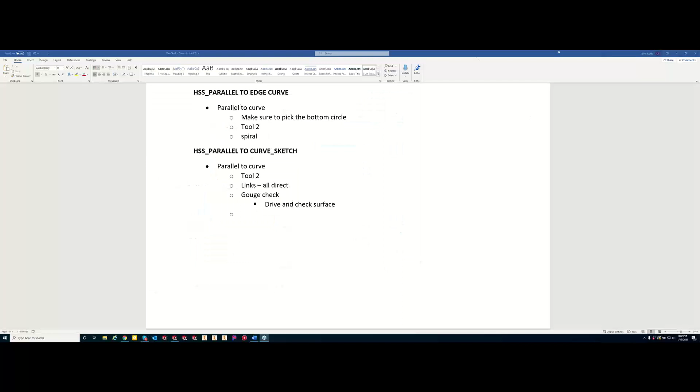So with that being said, we will get the ball rolling here. And now I got no extra monitors. There we go. Okay, so we've covered in the last few night classes HSS. We've covered linear, which is more geared towards our 0 to 45 degree angles, kind of like right here. We've covered constant Z, which works best between our 45 and 90, and we also did hatch.

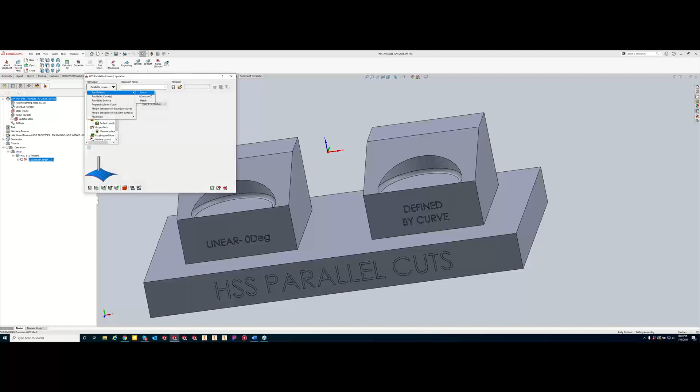So now we're getting into what I consider the real good stuff with HSS and the power that it has. So what I'm going to do is show you a difference between linear, and then we're going to be covering HSS parallel to curve or curves. So for our first one here, we are just going to do our linear, and I want to show you guys the power that HSS has in here. And let's get some toolpath on here. All right, so now we'll go ahead and save and calculate.

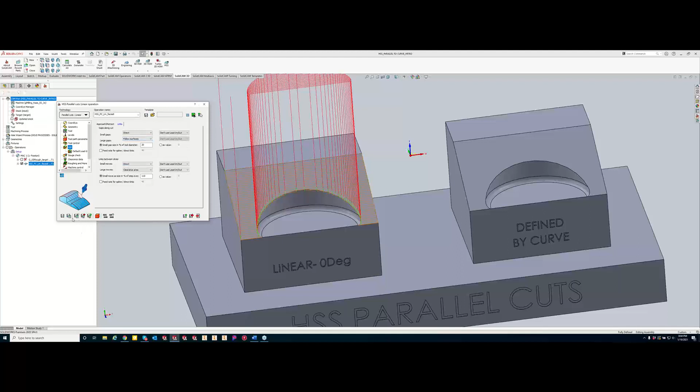Now, like what we've been talking about in previous classes, is how to clean up our linking to make smooth transitions all the way across. So what we'll do is we'll go to our link section, and we have a gap right here. So instead of going up to the clearance area, I'm going to tell it to follow the surface. All right, so we got a nice toolpath going back and forth, right?

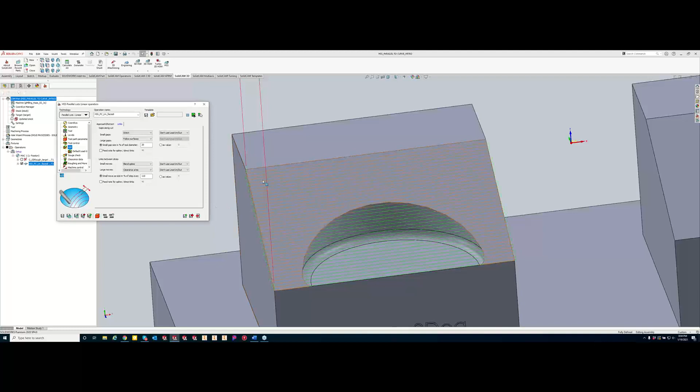Now, like we talked before, this is a little bit of refresh, but at the ends right here, we have those square moves. So what we can do here is, instead of doing those square corners right there, we'll do the blend spline, and we'll get those nice radiuses going all the way through, okay? So now we are basically skipping over this gap right here because we don't need to cut it. So we're cutting air in there.

Now, if we do not want to do that and we want it to drive our toolpath lines based off of a curve, that's where the HSS parallel to curves comes into factor. So what I'm going to do here is I'm going to just make an exact copy of our linear toolpath, and I will switch this over to parallel to curves.

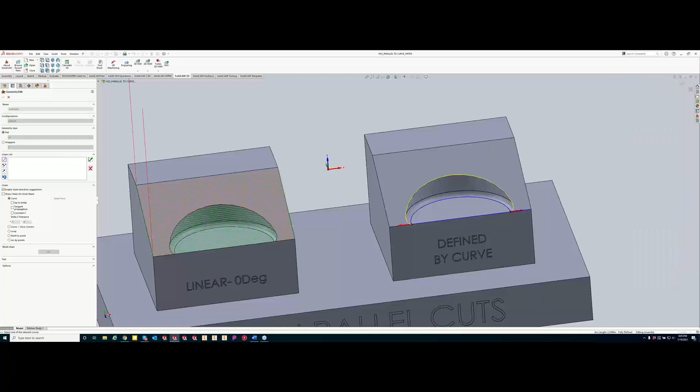So now our drive surface is the same surface as we clicked on the previous one. Now our edge curve is the curve that we want the toolpath to follow. As soon as I get this on here, this will be a little bit more clear for you guys. So now, instead of doing straight line movements going back and forth, we told it to follow this curve edge, so our toolpath reflects that now.

So now, with that half moon in there, we're not wasting any time cutting air. We're still achieving the same step over as what we had over here, but now we're not cutting air. Now, like we did on the other one, we can come to our links.

And then we can do a blend spline here. And we got a nice clean toolpath.

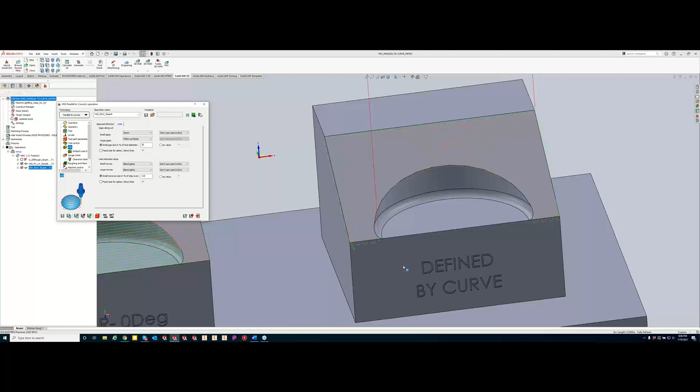So like I said, we're coming in here. Actually, we're starting at the top, and we're following that curvature going all the way around. So think of it, if you're trying to drive your tool to follow a specific shape. Now, the real nice thing about this is it doesn't have to be actually into the geometry itself. So right here, we have a half moon cutout with physical geometry there.

But let's go ahead and hop out of this part real quick.

Kevin, if I want that toolpath to be the same every single time, when you selected those parameters to have the toolpath follow the half moon shape, will those parameters remain there next time I come around to make that to do something similar? Nope, so they won't remain there.

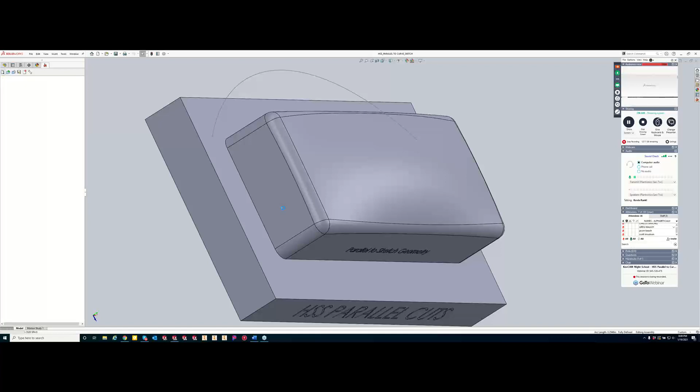But if this is something that you commonly want to do, what you can do is, let's say anytime we're cutting linear cuts and we want those, like our links, we always change up our links, and you guys have been seeing me changing up those links constantly through the linear and the constant Z and hatch. You guys can save that out as a template, and then you can also load that as your default template. So then what will happen at that point is anytime I pull up an HSS operation that is parallel to a curve, it will have all those parameters set up for me.

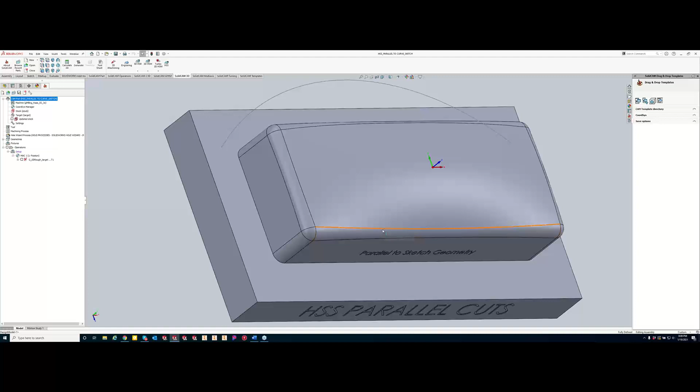Oh, okay. So I could just come back in and just select that template and off I go. Yeah, absolutely. So in here, let's do one.

So HSS. And for those of you guys that have been watching for a while, this GoToMeeting just takes my computer to its knees.

Okay, so if we are doing parallel to curve, and in my links section, I always want my links between slices to do a blend spline as well as a blend spline. For the gaps, I'm going to leave, well, usually with a large gap, I have it do follow surface. And that's about it. So that I want these to be a default. So every time I open up a parallel to a curve operation, this will already be set for me.

So how we do that is we can save it out and just do parallel curve, and we'll hit OK.

Oh, didn't like my name. Nope, didn't like something in here. I may need to grab. Well, no problem, Kevin. You don't have to go through the motions. I just wanted to know if it's possible to save it. That's really all I wanted to know.

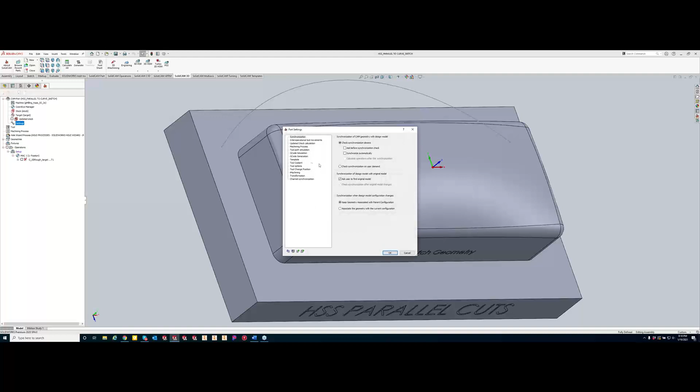When you get all your parameters set in there, then in your settings right here, we can go to our templates and we can go to our HSS and I can pick. So I don't have any templates set up. I'm just going to see if I have any of these.

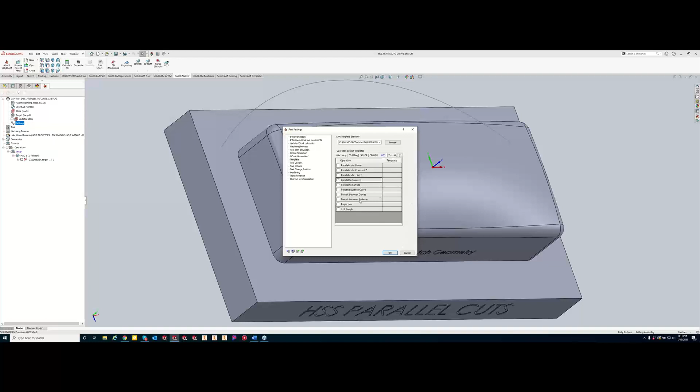So if I had my template set up, or saved as a template, while doing parallel to curve, I can pick my template. Any HSS parallel to curve operation I start new will have all those parameters set in there. This will do it just for this local part, or you can do it for your global settings, so any new parts you create will have that default template in there.

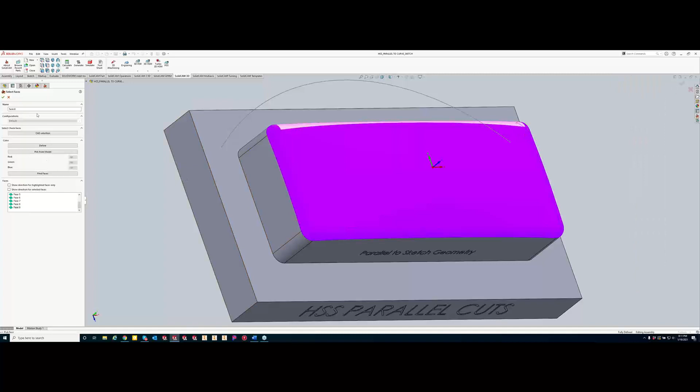Okay, perfect. So now we're going to do the exact same thing as before with our HSS parallel to curve. For our geometry, I'm going to select the surfaces that I want it to cut. Now the tool path, the tool lines I want it to follow, is this big arc right here.

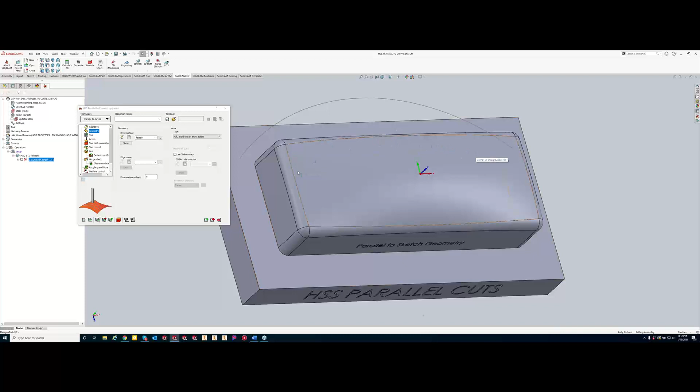All you have to do is right click and create a sketch. That sketch can be whatever shape or direction you want the tool path to follow, and it will follow that. So now let's set that up as our guide curve, I guess you could call it.

All right, so now let's just go ahead and save and calculate. And we got a lot of bouncing up and down, so let's go ahead and clear that up real quick. Link.

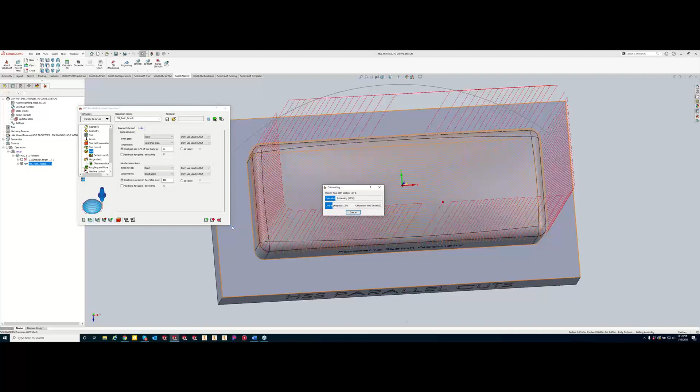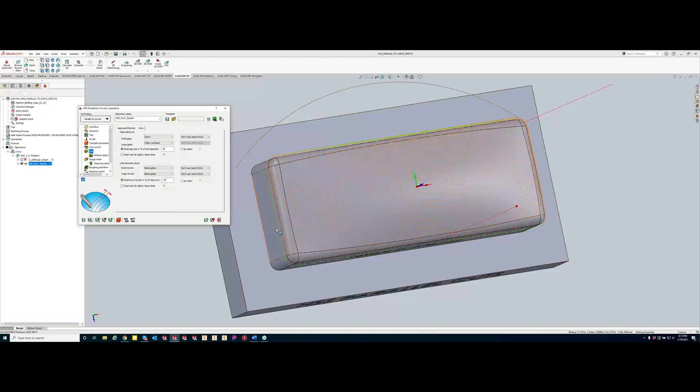We got some gaps on the back side, so I'm just going to do a follow surface. I did kind of forget to start off, but I've told everybody in the class: think of your HSS as a building block. Start with your geometry, start with your tool, save and calculate, get your tool path on there. So now I'm not changing ten different things at once, I'm just changing one or two things, save and calculate, to get what I'm looking for.

So now you can see, even though we're on this linear surface, it is following this guided curve for my toolpath. So this radius right here is going to be the same down here, just going back and forth that way.

Now, like any of the other HSS ones we talked about, there may be some gouging in there. So what we can do is go to our gouge check. For those that are new listeners, the gouge check is basically telling it that we do not want to gouge the part file.

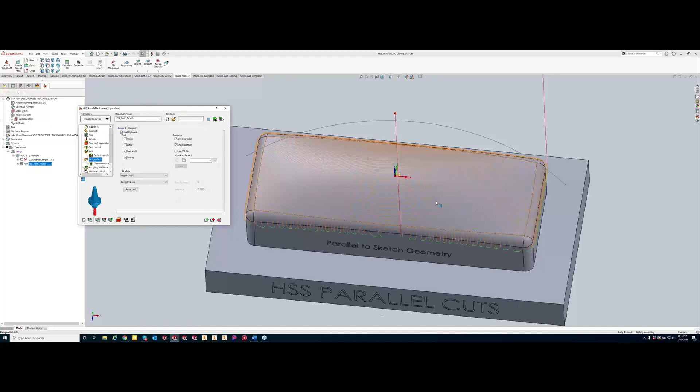Hey, Kevin, yeah, why don't you show the simulation first? That way everybody can see where the gouges are coming from and what steps you're going to take to rectify that.

Turn off. There we go. All right.

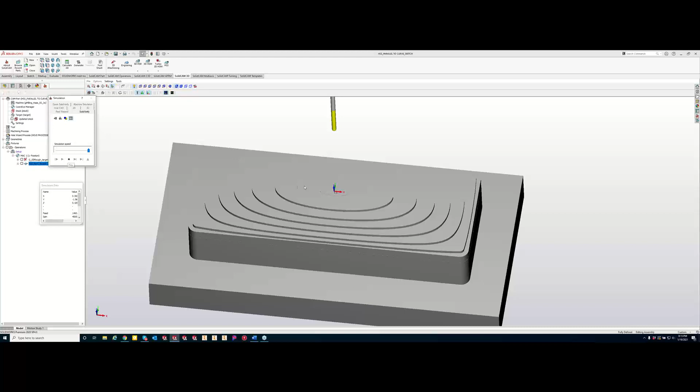Hey Kevin, is this the new release, is this 2021? Nope, not yet. Oh okay, sorry, didn't mean to steal your thunder there. Soon to come, soon to come.

All right, sounds good. So you guys can see right now we have a fairly large step over. That's kind of like what we've talked about in previous classes: keep that step over large, get that toolpath form we're looking for, clean up your links, and then one of the last things to do is tighten up your step over, and that will give us the good finish. But we'll let this play through.

Well, let me see my settings real quick. That's why. Switch over, switch back. I had a very, very high tolerance there, so let me get this fixed up here. There we go, moving a little quicker now.

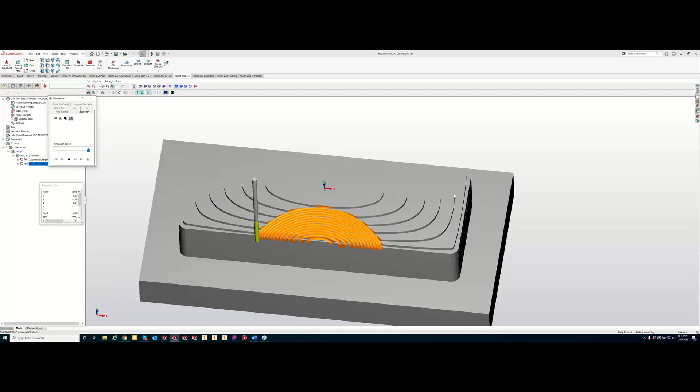All right, so now what Greg was talking about is let's see if we're gouging into our part here. And my go-to meeting is blocking. No. So we can see we're pretty close to up to size on our drive surface.

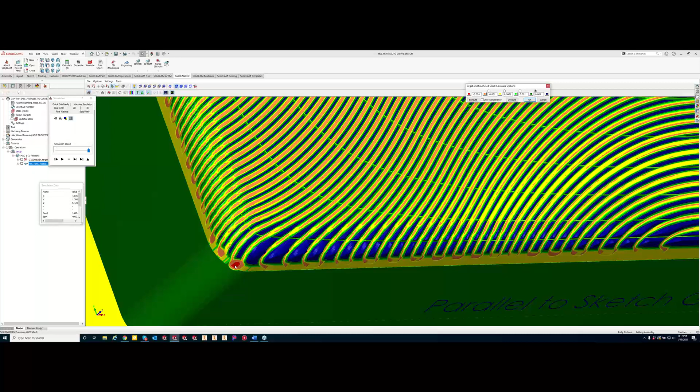Now, obviously, we want to play this through on a much finer step over, but right here I can already see that when it's doing the follow surface, we do have some gouges happening right here. Let's just hop out of here, and let's go to our toolpath parameters, and we'll set our step over to something smaller now.

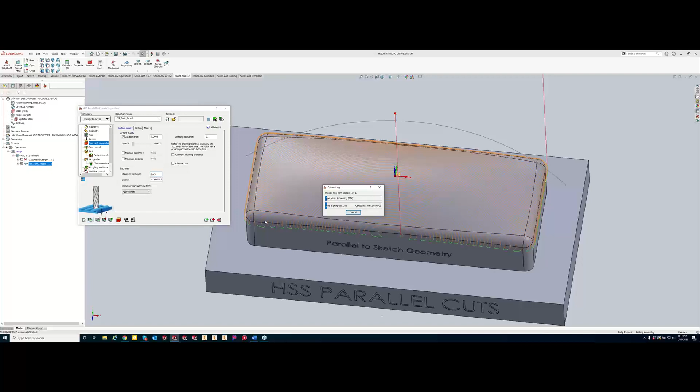So we can kind of see a little bit better of a surface finish in there. All right, so we got a much finer step over. And we'll go do our solid verify here.

Yeah, the only reason, Kevin, I was asking about 2021 was this calculation time was really impressive. I mean, but I hear that 2021 is even faster. Is that what I'm hearing?

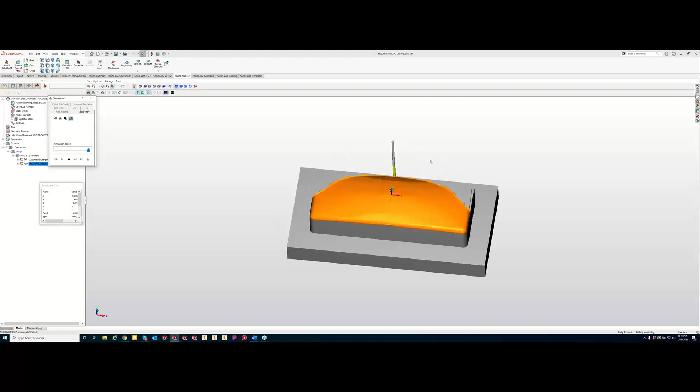Yeah, absolutely. I just got to get a new computer for doing these night classes because something to do with my current computer. It's just slow running this go-to webinar here, so usually this would calculate much faster and have quicker times.

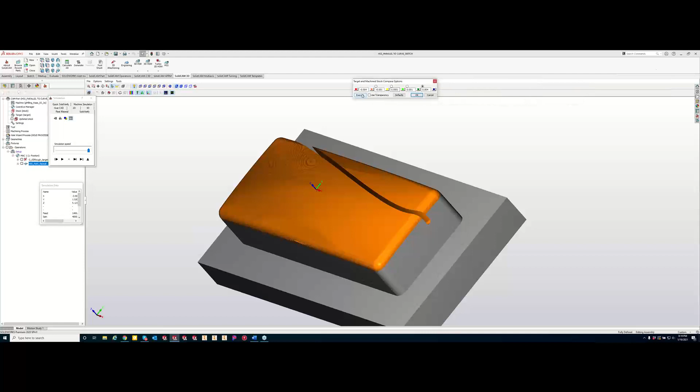As well as, let's kind of look back to one of these sides here. We can see that we're gouging along our backside as well. So now what we want to do is clean up those gouges.

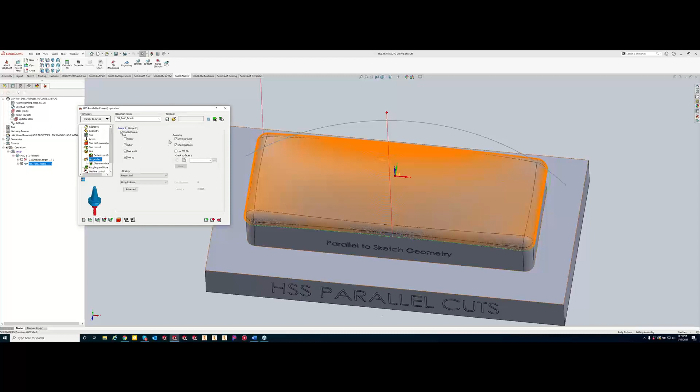So what we can do is go to our gouge check, turn on our gouge check, and what we're doing is telling it not to gouge into the drive surface. Our drive surface is the surface that we selected that we would like to machine. And with the check surfaces here, I do not want it to touch those surfaces.

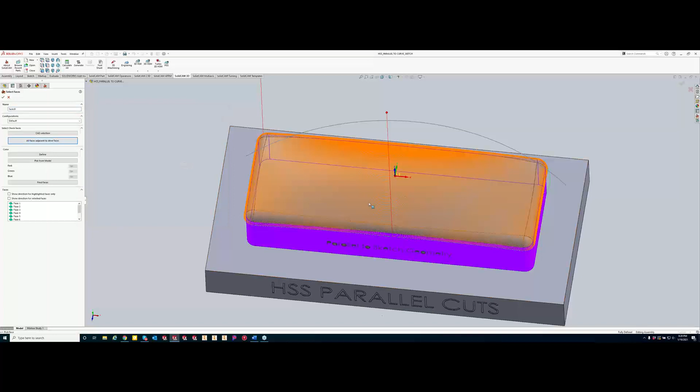So what I'm going to do is tell it that I want all the adjacent faces to my drive surfaces to be a check surface. So basically, I do not want that tool to touch there. We'll go ahead and save and calculate again here.

And now, if we do a simulate, play - oops, hit the wrong button here.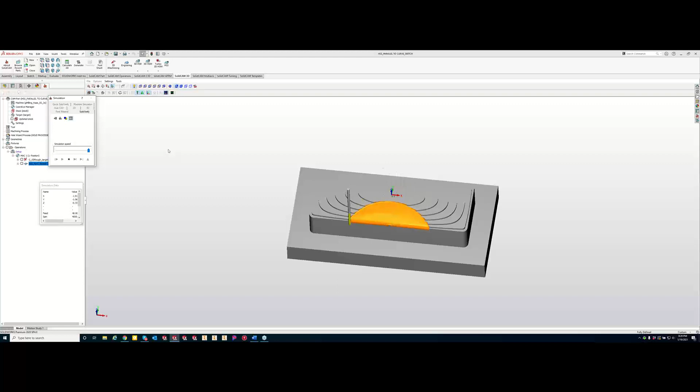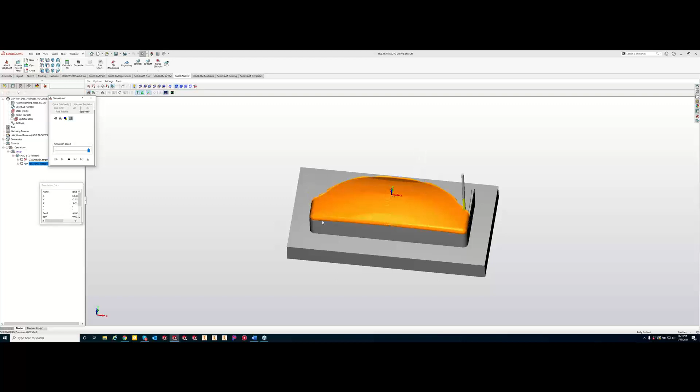So kind of a repeat, HSS will gouge your part just based off of the surfaces. If we're coming up to another surface, kind of like what we were working with when it was gouging down here on the ends, we got two surfaces that are matching up and it's not seeing that other surface. So by telling it to use that as a check surface, it knows that we do not want that tool to be touching along there.

So now you can see, one, we saved our ball end mill, and two, we're not gouging through our part now. So now if we bring up our stock target comparison here, you can actually see we do have a little bit of material still up here up front, and that's just my step over that I can change up.

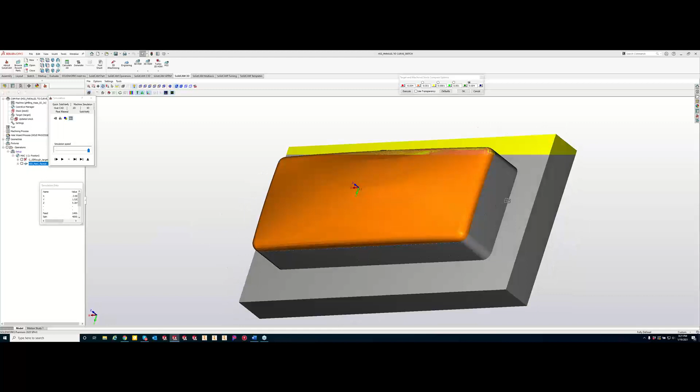But just as an example, rotate this around here, trying to get this so it's smooth. We are no longer gouging that entire side that we were looking at before, as well as on the backside here, it was showing us gouging that entire back side, which has now been fully cleaned up.

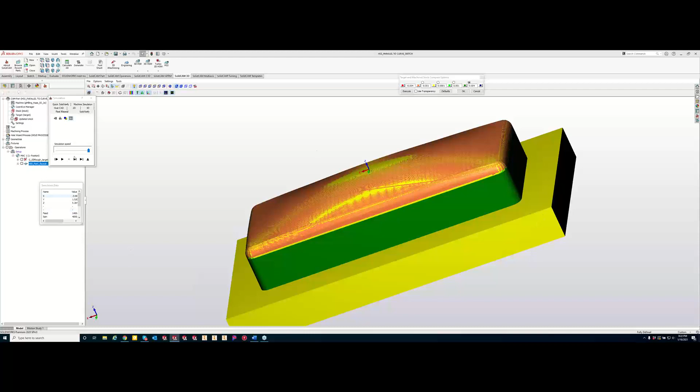So basically what it did is it trimmed up the tool path to tell it not to have that ball end mill touch any of these faces going all the way around. Does that make sense? Makes sense to me, that's all that matters then.

So in this tool path here, like I said, this is not an ideal tool path for this part, but what I wanted to show you guys here is you can go off of any sketch that you create and have your tool path lines follow that sketch to a T. So which is real handy.

Now, typically on something like this, if we switch it over, if we didn't want this weird shape that we drew in there, what we could also do is go to our geometry, switch up our edge curve, and we'll chain this guy around.

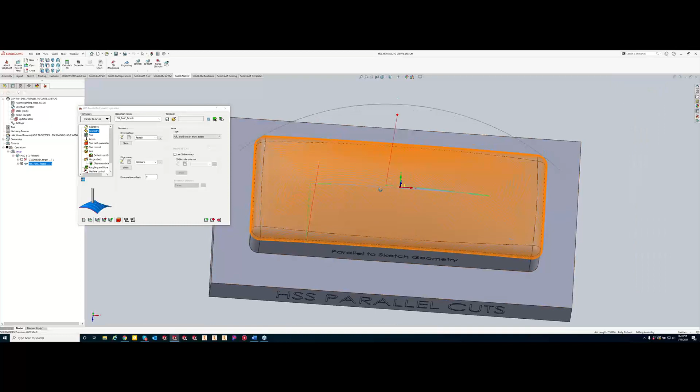And now we're starting, well, it looks like we're starting on the inside. And if we want to start on the outside, a little bit of refresher here, but we can do the flip step over.

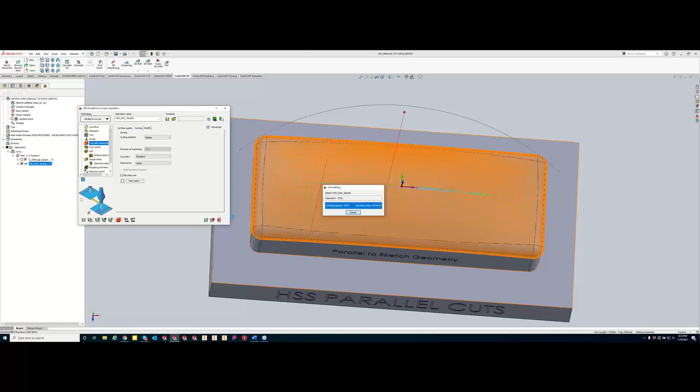And now we're starting on the outside, working our way towards the center now, so it's keeping that square shape. You can see our tooling lines coming through here, keeping that square shape going all the way through. And you can actually see we're rounded right here, but as it gets closer to the center, it turns more into the square edge. So any questions on this part in particular?

Nothing coming in? I don't see any questions coming through the questions panel, but I have one for you. I was waiting for that one.

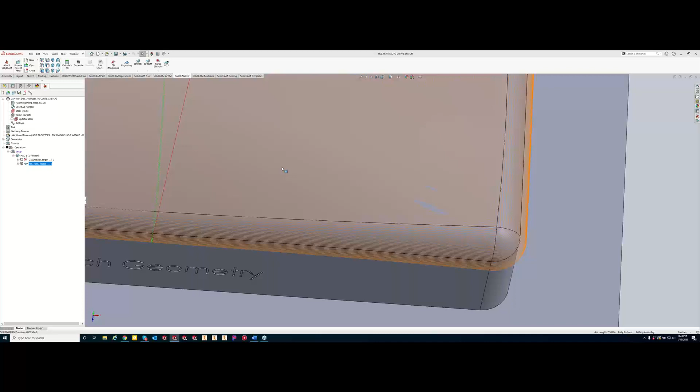Can you show everybody watching at home or on YouTube what happens when your sketch geometry does not extend past the extent of the surface you're cutting? Oh, so if we were to draw a square just in the center here, or just take that arc you currently have and make sure it's shorter than that top surface you're cutting? Let's just go ahead and edit that sketch.

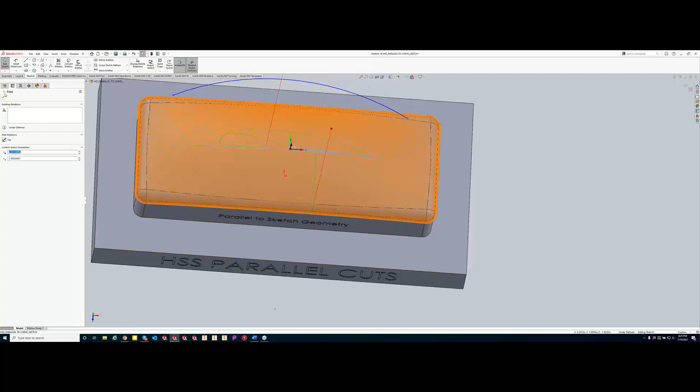Something short like that, and like that, yeah, on both sides. Okay, so now go ahead and grab that new edge curve. You may want to tone down the step over so we can get a visual of the paths. Let's go back to our standard 50 thou here.

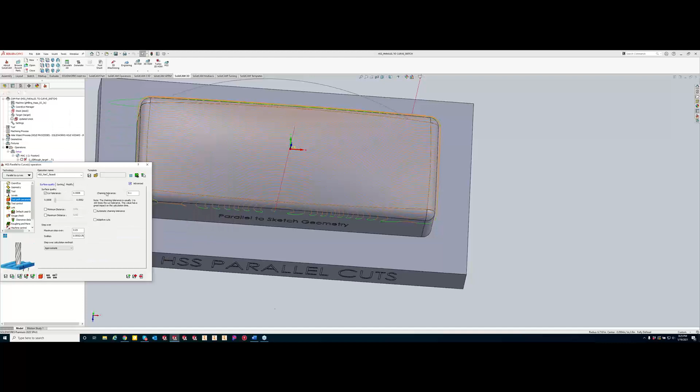So when your geometry does not extend past, it's going to go more with a linear path. Let's see, how can I explain this? We're arcing right here, and since our geometry ends right here, it's just going to continue straight over for us. Yeah, so it's almost like it morphs between, it'll try to do the arc pattern for as long as it can, and then it morphs into the surface, right?

Yep, exactly. Is that where you were getting at, Greg, too? Yeah, I wanted a visual for everybody at home in case they run across a scenario like this, where when doing parallel to curves in SolidCAM 2020 or previous versions, if there's nothing to constrain that surface to that guide curve, the toolpath is going to have more chance to wander. It's definitely going to wander. So just make sure that if you're trying to get something to stay parallel to that curve, the curve extends the entire surface.

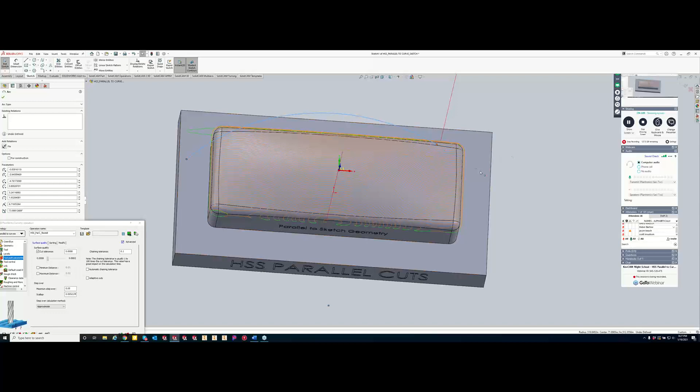Yeah, absolutely. And it's simple - if you guys are drawing sketch geometry and getting wandering in a direction you don't want, come in here - you've kind of seen it before - even if I go way past... don't want, no. So I'm going way past now. Hop out of our sketch. And this is why I love SolidCAM, because you can make a sketch and just repick it right away.

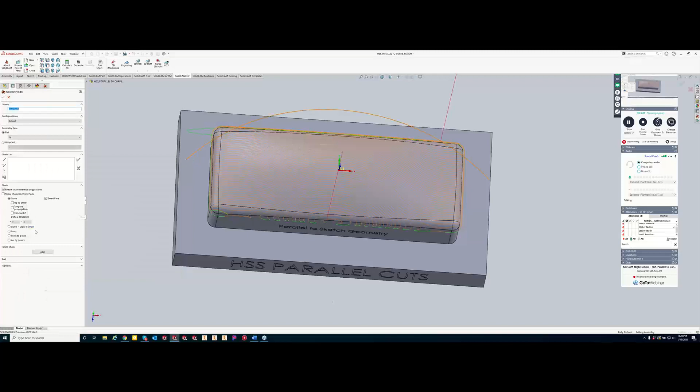So long as you have your geometry up to tangent or past, it's going to follow that curve right up to a T. But like Greg was just talking about, if we don't have that area there, it's going to follow that curve where it stops right there, then start wandering off into its own area. So the more you can make this tangent to the sketch face here, or just go past it - anything tangent or past it will follow it to a T. If you're coming up short, you'll get some other tool path going in there, just because it lost its curve after that certain point.

All right, one last part for you guys.

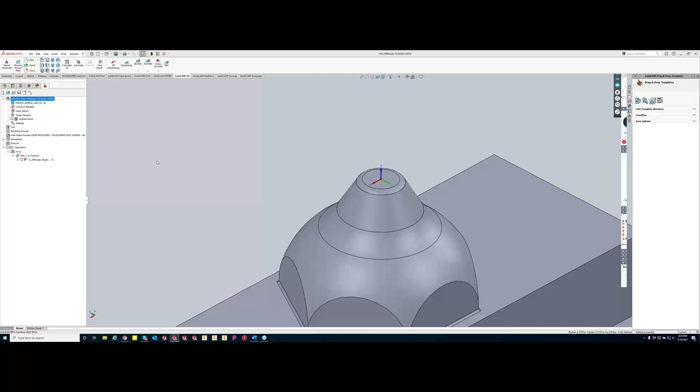Yep, absolutely. And if you guys don't ask it, Greg will get me on the zinger and get some kind of advice for you guys. I'm a man of the people.

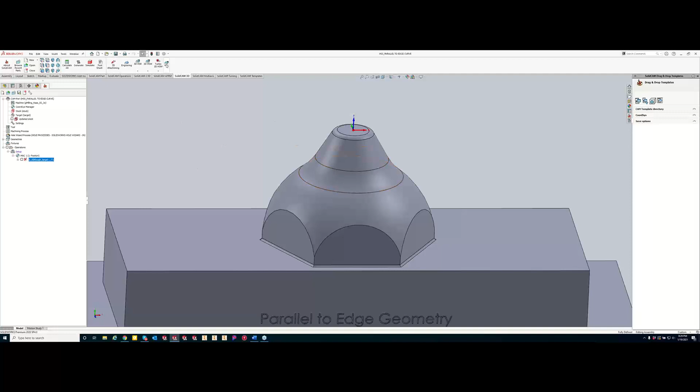Again, we're going to do HSS here. Now it's still set on my parallel to curve, so my drive surfaces that I'd like it to cut - let's go here, here, and here. The order that you pick these does not matter, so if I start up here or start down here, that order does not matter at all. Now, since I want to keep that circular pattern going, I'm just going to grab a circle as my edge curve.

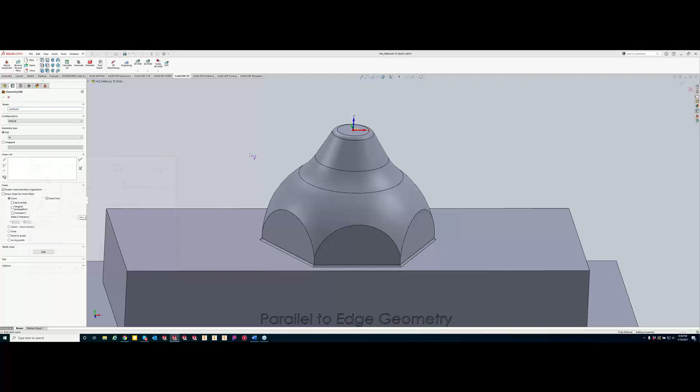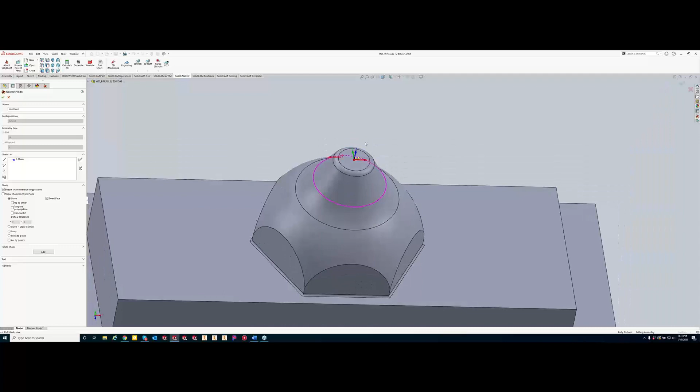But this will kind of go back to what we were just talking about with the tangency point of that sketch. If we look straight down, I'm going to have a nice circular pattern going around this hub, but once I go outside that boundary, we're going to see something a little different. I'll show you guys what we can do to get that circular going through the entire cut. So go ahead and grab a tool here.

Save and calculate - like I said, do it as a building block. Okay, so now we have a lot of retracts, but one thing I really like about the HSS is I can come in here and tell it that I'd like it to do a spiral.

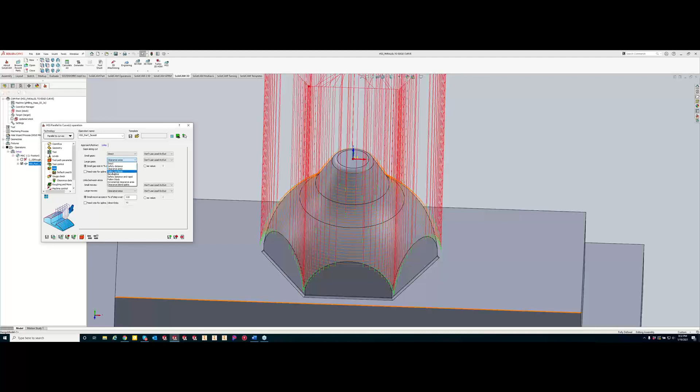So now what it's doing is it's starting on the top and it's spiraling down all the way through. Now, if we go to our links and we do a follow surface, and that's not coming up very good. Let me just turn off this face here. Okay, so now we're starting at the top and we're doing a nice corkscrew or a nice spiral working its way down.

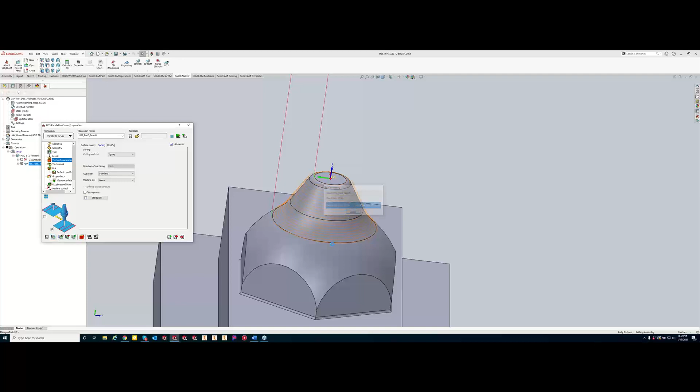And how this would have looked if we were set to zigzag, is here is our start and end for each pattern. So as we go around, it's going to come around here, go up, come down, and then do a reverse. And then come up or move over, come over and go around again.

So this is one nice thing about the HSS. As long as you guys have the full HSS, you will have the option to do spiral. If you guys are running limited, you will only have zigzag and one way. But this toolpath here will get you a really nice looking toolpath finish in there.

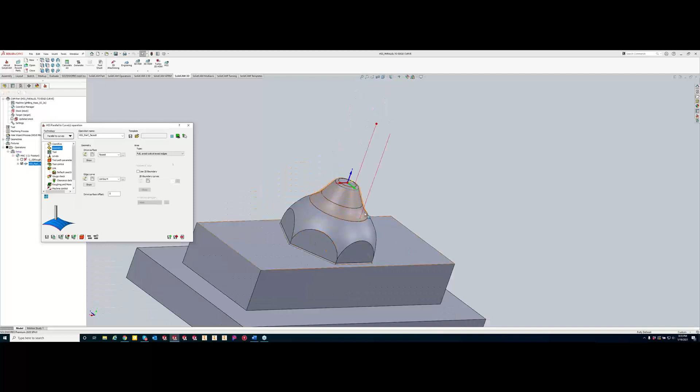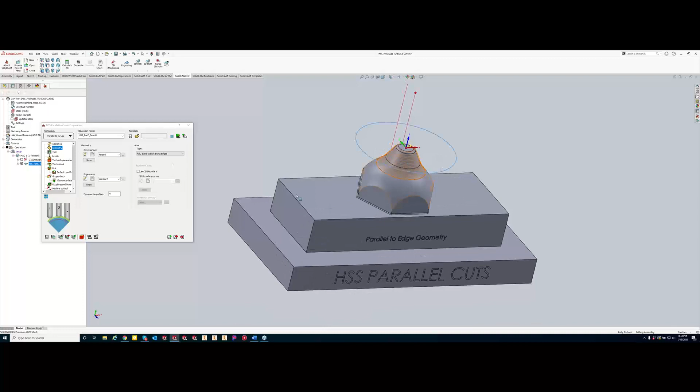Now, just so I can try to stump myself, let's go back in there and add that surface in there. And then what I'm going to do here is just do a normal to. And I want to throw a sketch on here of that circle. Okay, so we got our circle. Doesn't matter on the plane that it's on. My edge curve now, it's going to be, okay.

Now if we save and calculate here, and we definitely have some linking. Let me start fresh on this one here. HSS.

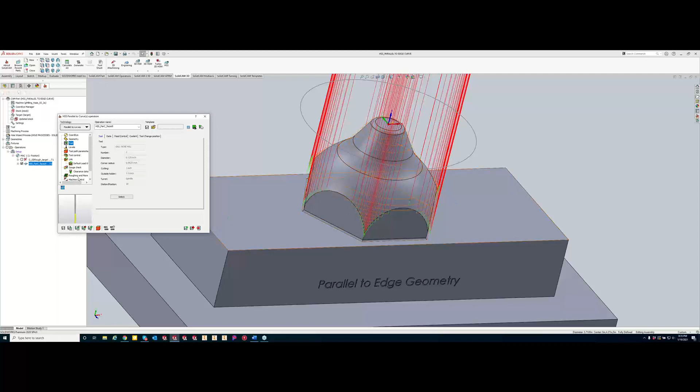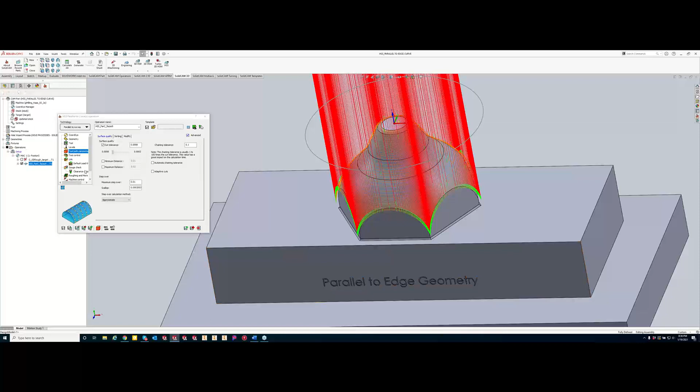Shorten that guy up here. Okay. So now we got our nice spiraling down here. And what we're running into now is as it comes across that circle, we're coming to a straight edge right here. So now if we go to our links and we will do a follow surface, see if that cleans up some of our, nope, that just gets a little bit messier.

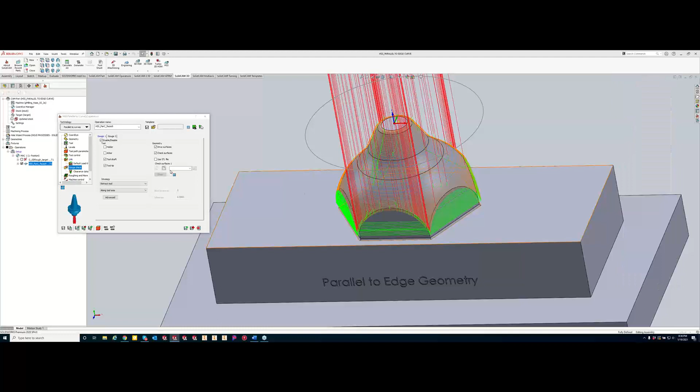Let's do, and I'm shooting from the hip here. Go to our gouge check. And we'll enable that. And do our check surfaces. I'm going to tell it all adjacent. Okay. So now, I'm going to tighten up my tolerance here.

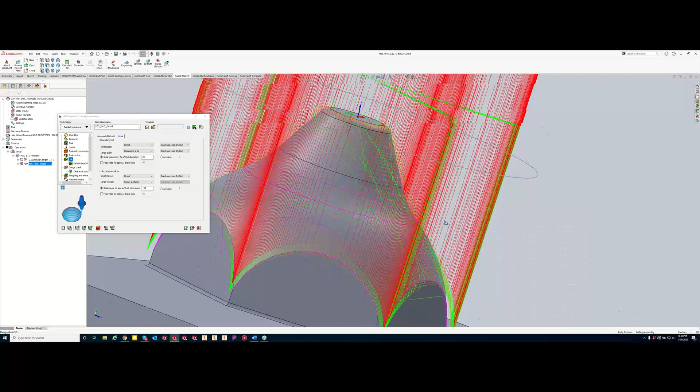We're still bouncing up and down inside here, which I don't really understand why. Let's go to our links here. And we'll do links between slices. Let's try doing a follow surface. Boy, that is just messy as can be. I'm trying to think here. What am I missing here?

I just think this is amazing, Kevin. I've never seen you actually stump yourself before. It's always great when I do it when it's live and I got hundreds of people watching.

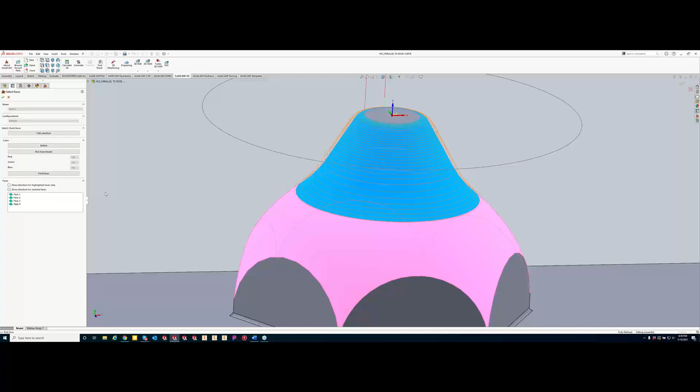All right, so when I add this surface in here, so let's edit, grab that, and I'm going to show the direction just to make sure we got all our arrows pointing out. That looks good, that looks good. But I don't have an arrow for that last surface.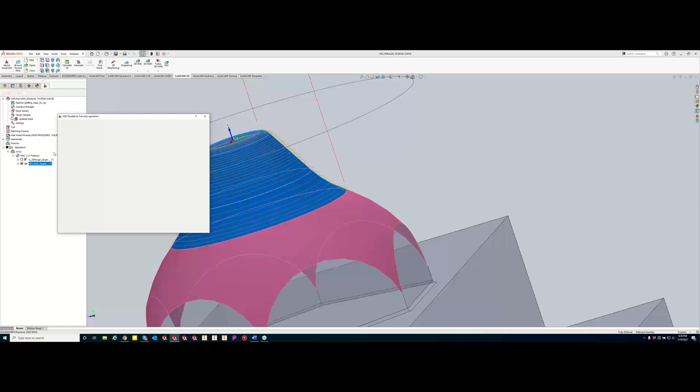Okay, now let's try. For the life of me, I am not seeing the direction arrow for my face 4.

So what I'm going to do, Kevin, is we have a suggestion from the audience. Would you like to hear it? Oh, absolutely. Okay, so Jason Beach says, why not just do a copy surface extend to have a projected geometry?

Okay, let's try that. I'm just baffled why that's not working.

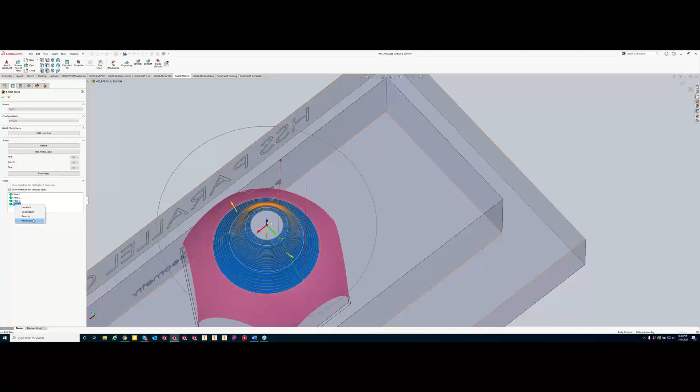We'll do Jason's idea here in a second. And I think if this works, we might have to send Jason a t-shirt and a hat. Do you like how Greg is so quiet right now? Just laughing, oh he's loving this. You just took my job on stumping you, so.

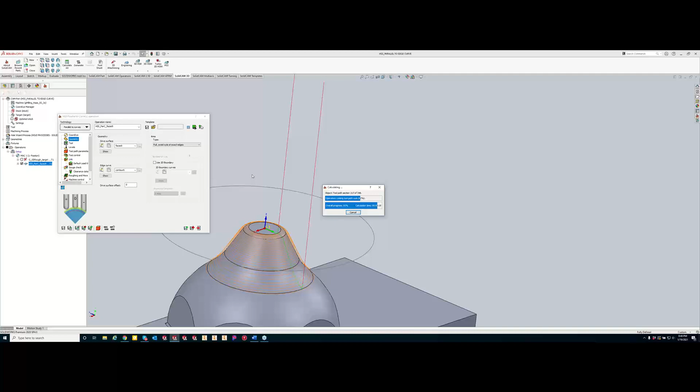Man, I cannot. Okay, so all else fails, start fresh. So HSS.

Okay. Now I think what Jason is saying is do the extend trim. Tool select.

And we'll go to toolpath parameters, extend trim, side extension. Let's just do 200% of the tool. Actually, it's going to be on the end, 0.

Okay, so now, obviously we need to go farther. Okay, so now we got that toolpath going around, and let's switch this over to spiral.

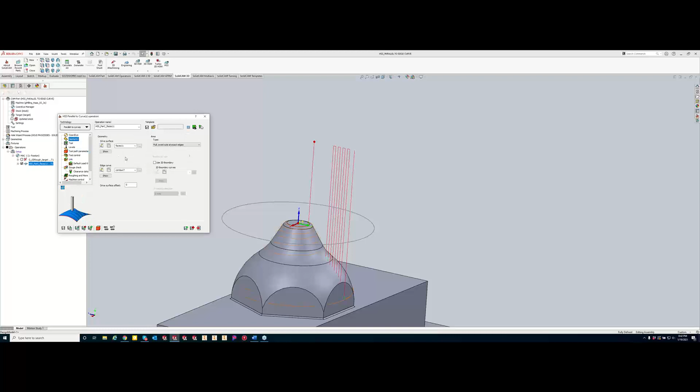Oh, geometry. Now, I may be wrong here, but I took Jason's comment as to create surface geometry that would extend, like you were just filling out that dome with the surface geometry and then using that as your drive surface.

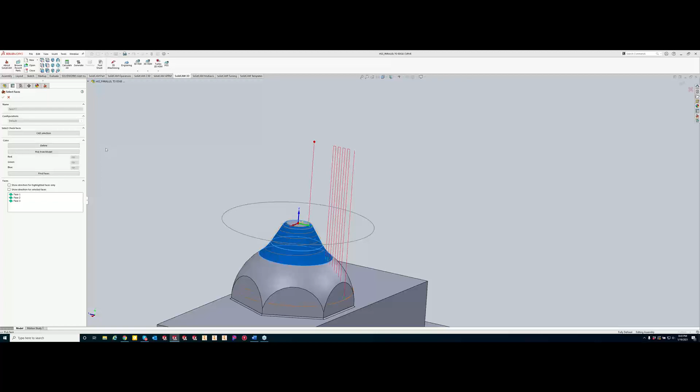Okay, you got me lost now. Say that again. Create surface geometry that would represent that dome. Instead of trying to do it through the toolpath, just create a surface that mimics what you're trying to do, and then drive the toolpath based off that surface.

Yeah, and he just said creating the surface was my intent, but the toolpath extend is a cleaner solution. Okay.

Greg, you're taking keyboard and mouse here because I'm still lost on what you're... Well, all he's looking for is, instead of having that hex cut into that surface, just have a fully round surface. Oh, gotcha. Okay. So in that scenario, it still bugs me that that's not working.

Okay, we're gonna try something here.

Well, either way, this is a good exercise. I mean, this really shows the alternatives, if there is a part that's challenging, it really kind of shows off the ability to deal with those challenges.

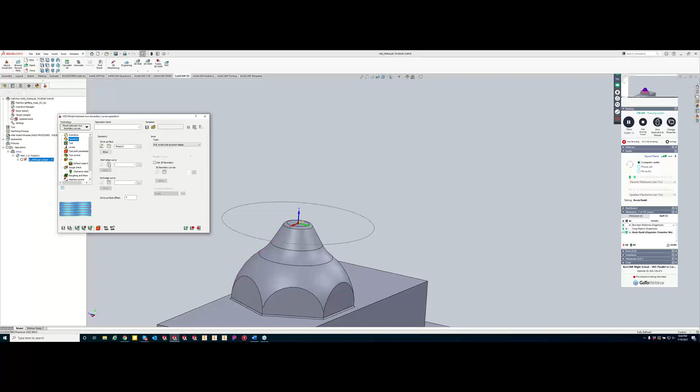So yeah, what I'm doing here is, instead of following one curve, I'm going to tell it to start up here as a circle and end down here. So this is a different toolpath that we're going to be covering in 2 weeks, but let's see if we get a better result here.

So wouldn't this kind of be essentially morphing between two curves, Kevin? Yep, and that's what I actually selected here. So what I told it to do is morph between two boundary curves. So this is one curve that we chose at the top, and we're going to go from a circle down into our hex shape right here.

And like I said, we'll cover this in a different class, but yeah, see, that looks much better. So in this particular part here, this is where the morph between two boundary curves would work much better than a parallel to a geometry curve.

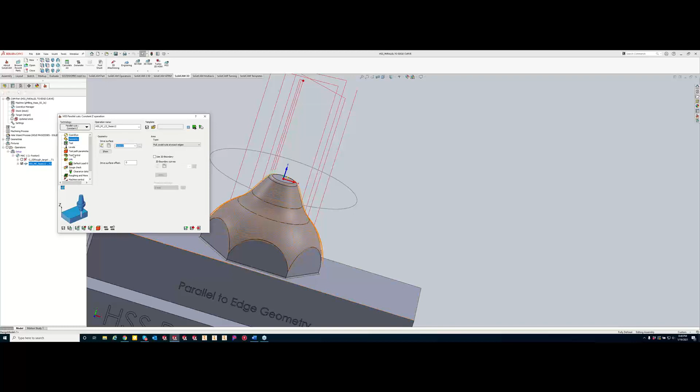Okay. So now with constant Z, we don't have to pick a drive curve. But all right, so our geometry, do a show, is still our same geometry as before. I'll turn off the path here. Tool, still going to be the same. Tool path parameters, we'll still at our 50 thou. We can go to our sorting, switch this over to spiral. Well, let's just do one way for right now.

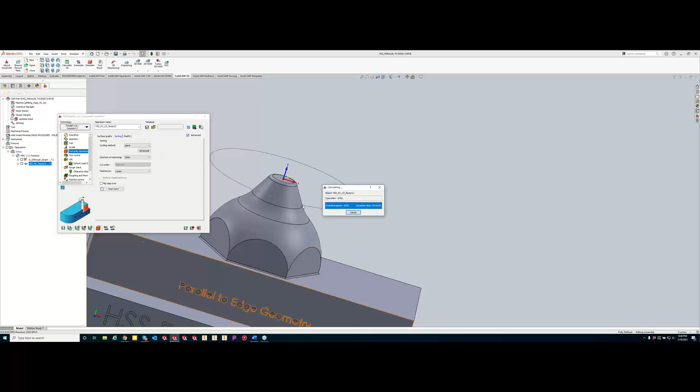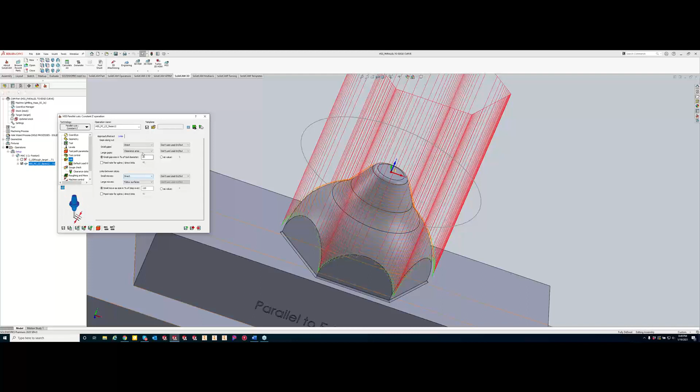Let's take as many parameters out of it as possible. Okay. So with the constant Z in a perfect circle, we are going to achieve the same results going through there. But now clean up the links again. Well, I'm curious about this one. Yeah. No, it doesn't look too bad. A little bit flat there on the sides, but provided that that material's been cut away.

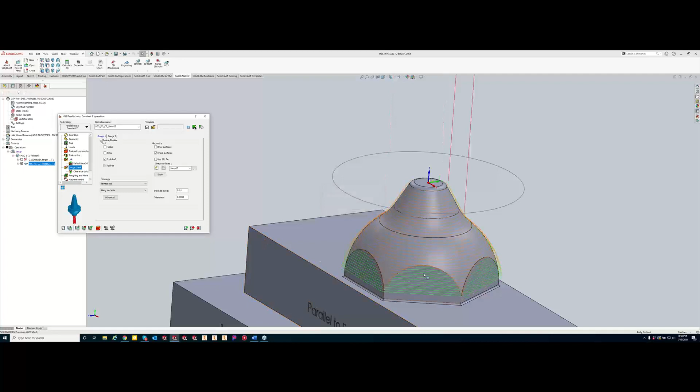Yep. And I guess at that point, what we could do is in our gouge check, we could turn on and just do a check surfaces. And once again, we can tell it to do all adjacent and to leave maybe a tenth out in there. So now that tool will not come in contact with those faces that we have told it by a tenth out.

So if you guys were coming in here, maybe you rough this out with 3D iMachining, and then now we're doing our surfacing, and then our last cut would be a profile operation, cleaning up that hex going all the way around. So pretty similar toolpath there. And if we wanted to clean up a little bit more, is we switch this over to spiral.

I do have a quick question for you, Kevin. Absolutely, when you're ready. Yep. Jason's asking, does constant Z also have spiral linking? Like the cut method right here? I guess he's specifically asking about linking. Yeah, he said yes, you're on it. Yep. Oh, okay. Yeah. So any of these operations that you will see in here.

Now, if you guys are looking, you open up HSS and you're only seeing parallel cuts and it says linear constant Z, that means that you are running the limited version of HSS. Now, there's a lot of downfalls of the limited. So with limited, you're only going to get your sorting method. You're going to have one way or zigzag. You're not going to be able to do advanced gouge checking in there, as well as your roughing and more, or your multi-passes, your translated, all that will be all grayed out.

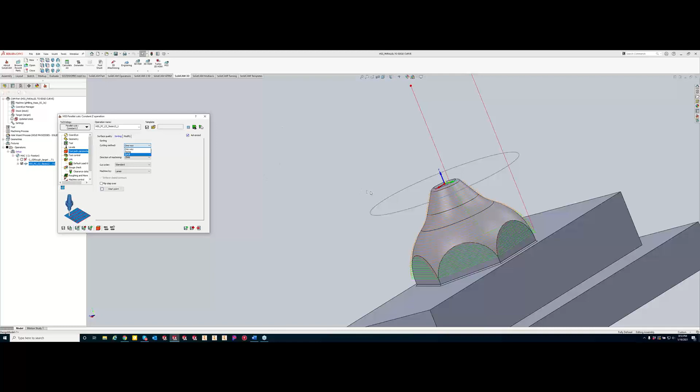All right, any other questions before we wrap this up for tonight? So far, that's it, Kevin. All right, so definitely come back next Tuesday. We will be covering the parallel to surfaces, and then we'll get to that morph between boundary curves, like we were just showing you in our messed up part there, and then keep going through the HSS series.